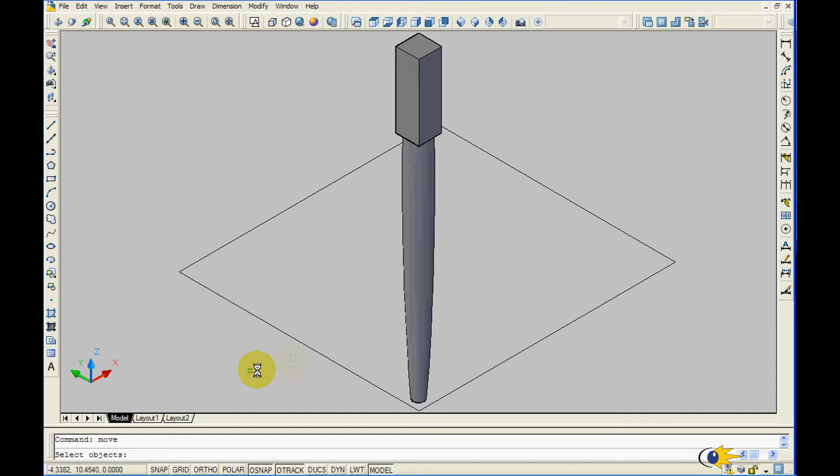Once you have that done, go ahead and type in move, and we'll go ahead and select that rectangle, and we want to grab it at the corner and put it right on the corner of the leg. You can zoom out and you should see very similar.

Now let's go ahead to the top view. Now we have essentially created a template for where the legs are going to go.

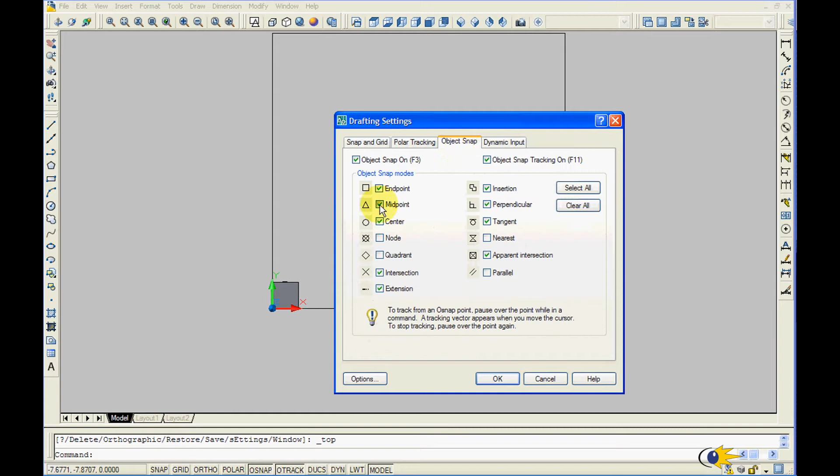So make sure object snap, the midpoint is selected, and we'll go ahead here and we're going to mirror the leg. So go ahead and type in mirror and press enter, and then we want to go from the top down and select that leg, and we'll mirror it.

If we go from the top down, we will not have selected the template, and we don't want to delete the source leg, so we'll type in no, or just go ahead and press enter, and then we will go ahead and mirror the bottom 2 legs again.

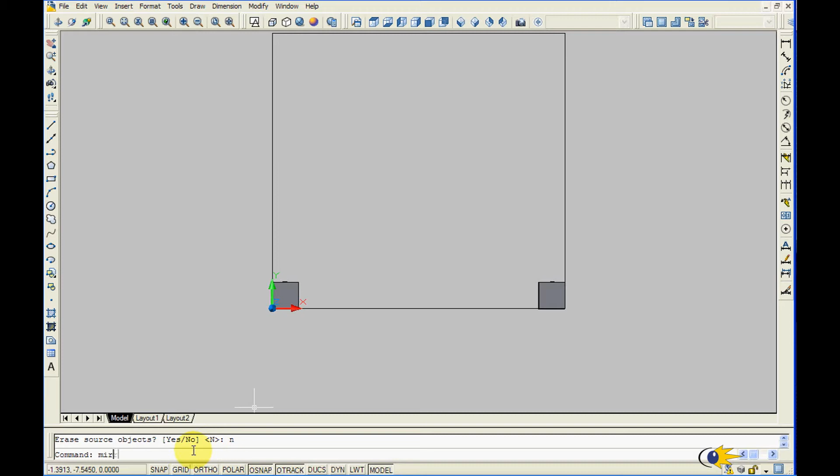Again, we will be going from the top down, so we don't select that rectangle, and then we'll mirror it above the legs, and we should have very easily and quickly created 4 legs.

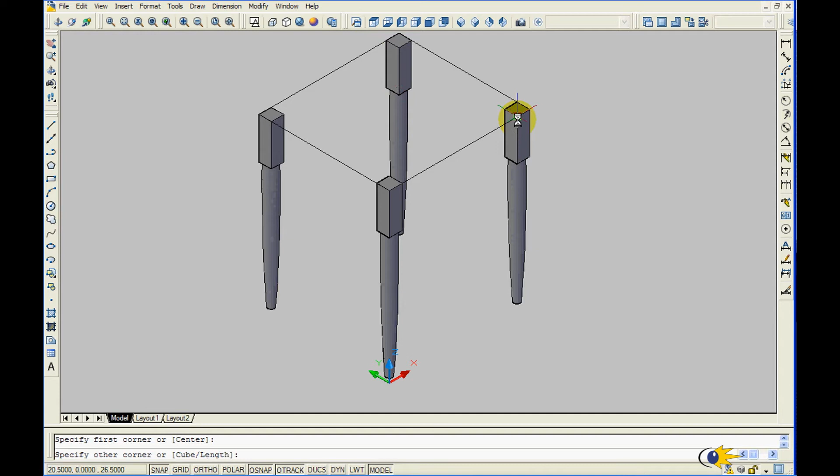Once we have the rectangle on the legs, we'll go ahead to the box command from the draw, and we want to go to the midpoint, and you should see that the extrusion goes in the direction that you put your mouse.

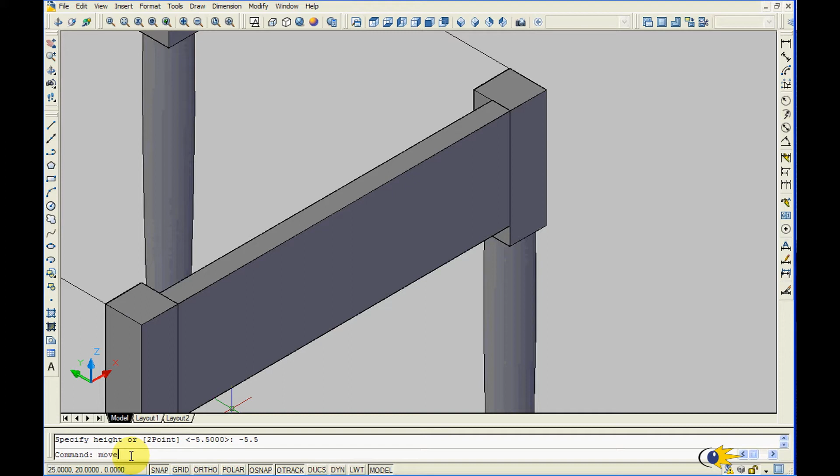And so in this case we typed in minus 5.5 inches, and we're going to go ahead and position the item to the middle between those legs for that support piece.

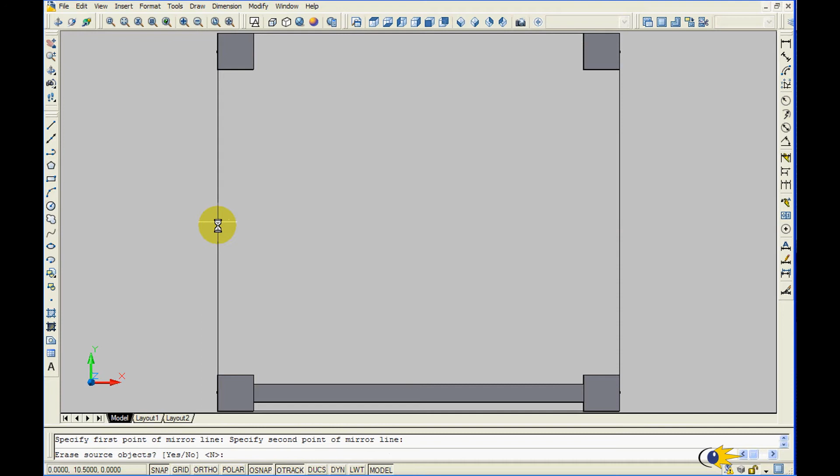Then we'll go ahead and mirror the object. We'll select the object and press enter, and then horizontally from the left to the right, go ahead and mirror it. We want to keep the source object so it defaults to no, or type in no, N, and you should see the 3-dimensional view that I have.

Then we'll go ahead and build the support piece for the back. So go ahead to the box and select the leg, and then we're going to go down again, minus 5.5 inches, and press enter.

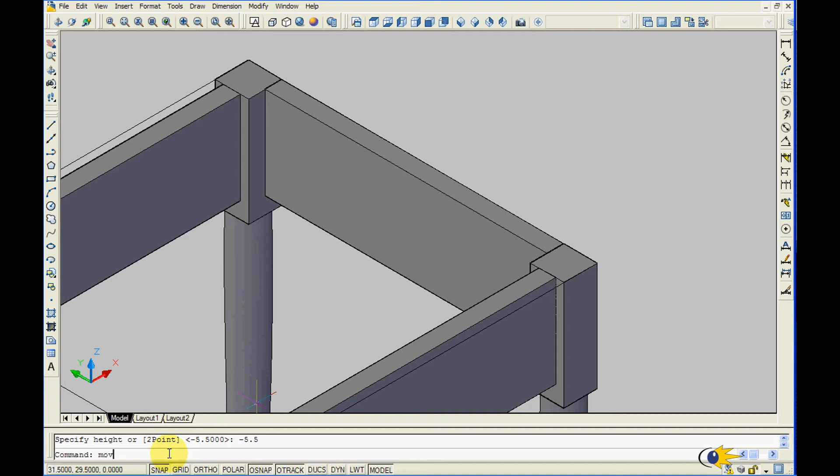And then we will go ahead and move it so it's at the center between the legs, and we want to go ahead and do that at the midpoint. You probably want to zoom in a little bit if you need to.

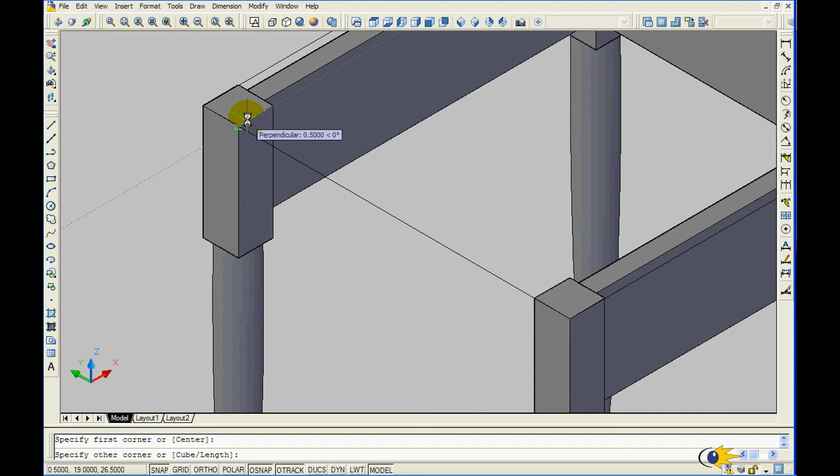Alright, and then we're going to do the same thing. Now we're not going to be mirroring the back piece because the front is going to be a drawer. So again, we're going to go halfway across and then down. On this height, it's not going to be 5.5 inches, it's going to be minus 4 inches, because that's actually going to be the drawer.

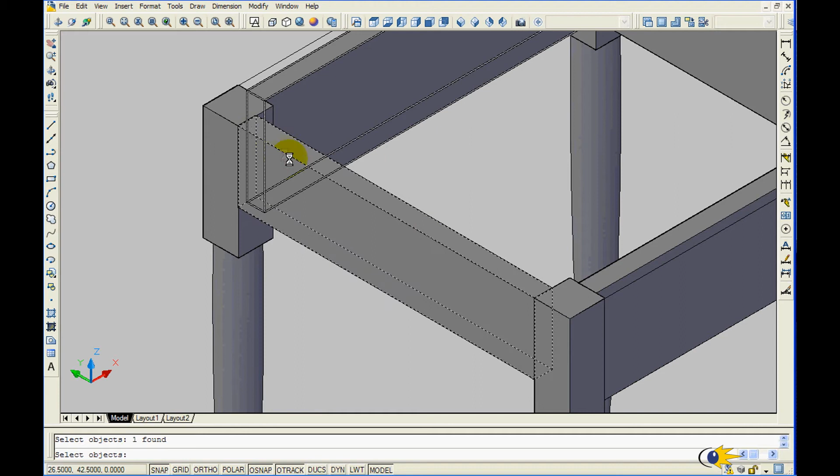And then let's go ahead and move the drawer. Type move, select the front, and press enter, and we'll move it again. We'll reposition it to the center, and we can go ahead and delete that reference point that we had built.

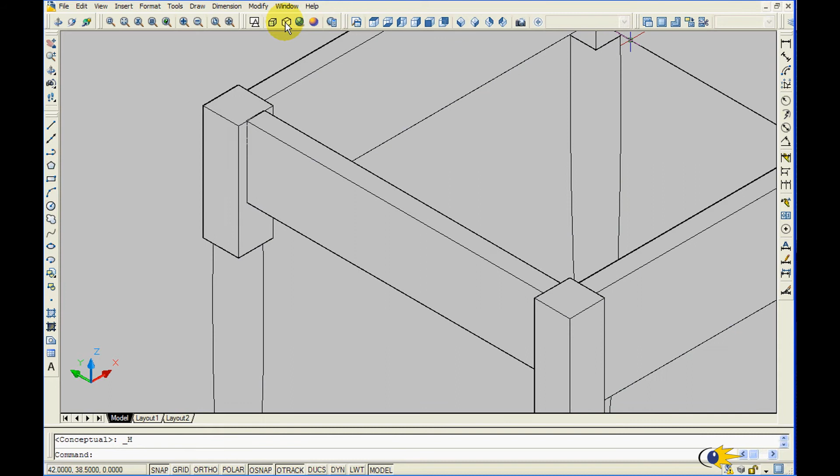So now we're going to go ahead and build the support underneath the drawer. Let's go ahead and change the view here so we can look at it in wireframe. Let's go to draw, modeling, and then we'll select box again, and we're going to select the corner.

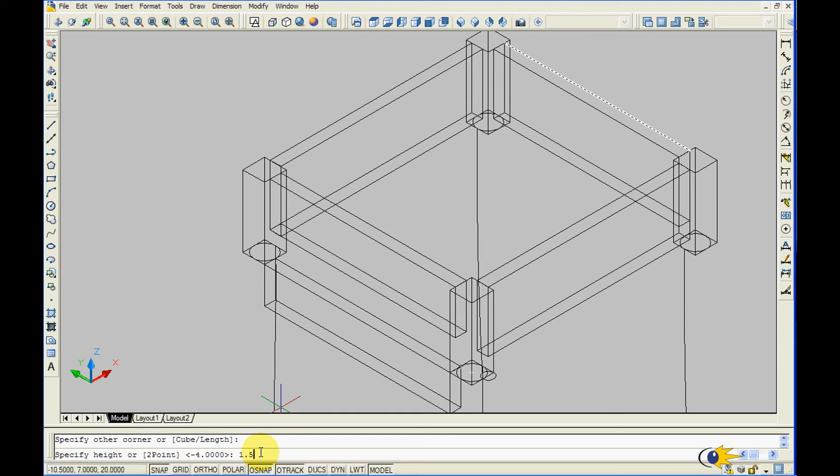We'll go halfway across and then use the other reference point, and this time we'll go up, and we're going to go ahead and type in 1.5 and make sure it's in the direction we want, and then let's look at what we just built.

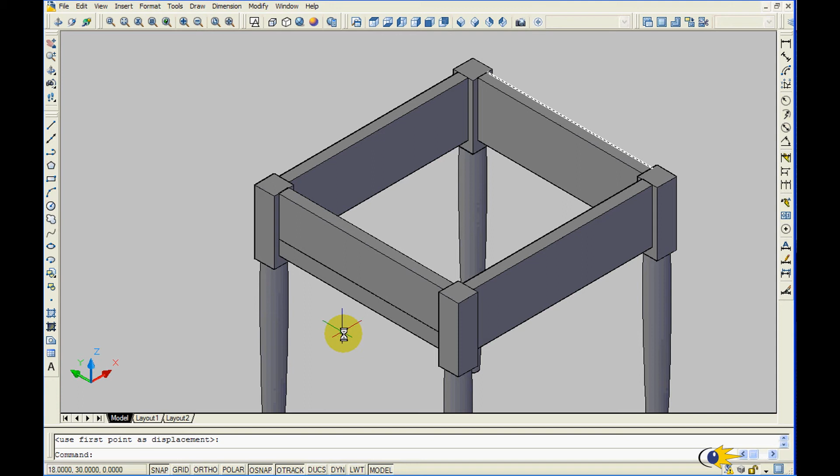So then let's go ahead to the top view and make sure that everything is positioned correctly. Let's go ahead to that 3/4 view. Let's select that rectangle, and we'll go from one corner.

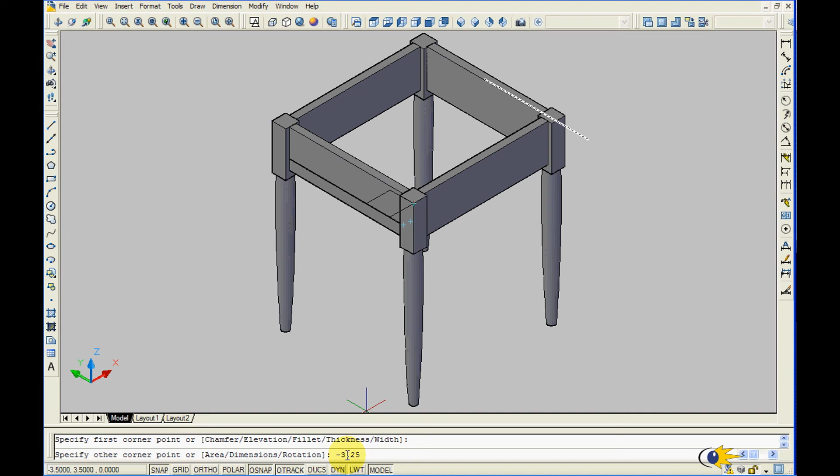And this time what we want to do is type in minus 3.25, comma, minus 2.5, and you should see that rectangle appear. And we're in the 3/4 view.

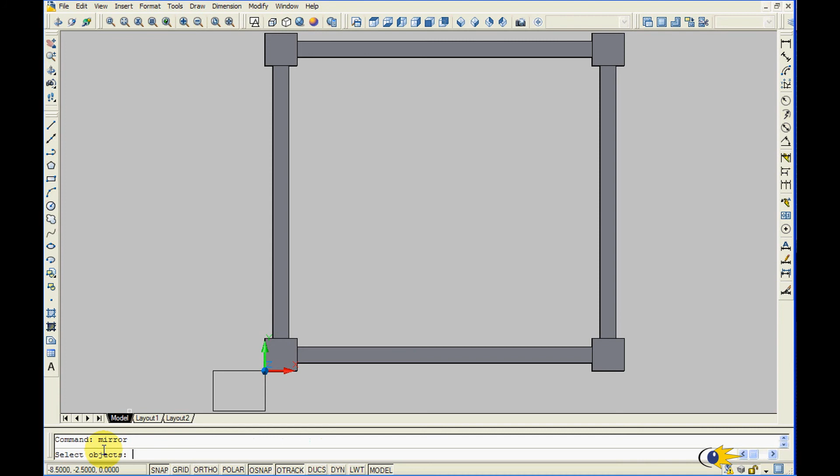And let's go to the top, and then we'll go ahead and type in mirror, and we'll select that rectangle and press enter, and let's go vertically, and then go ahead and horizontally mirror. I'm going to select the bottom 2 pieces and press enter, and then the midpoint I come across, and I don't want to delete the source object, so type in N for no.

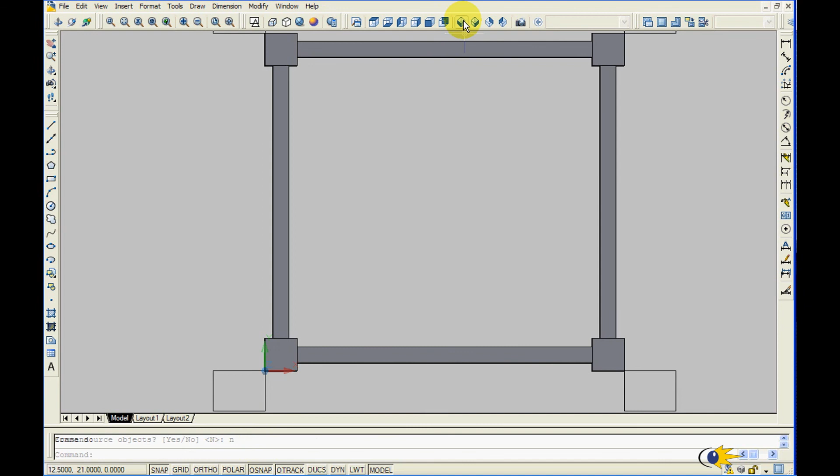Alright, and now what we're going to do is we're going to use these rectangles that we built as the basis for the work surface.

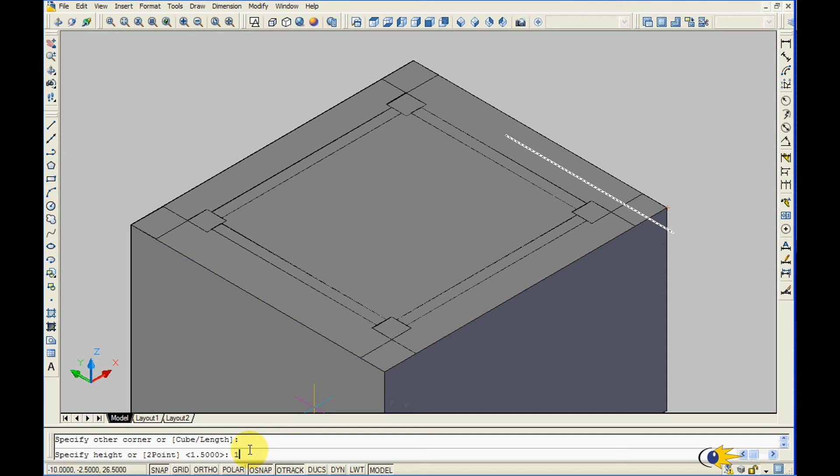So let's go ahead and select a corner and come all the way to the other corner, and then move the mouse up, and then we'll go ahead and type in 1 inch. And you've completed the basic construction for the shaker table.